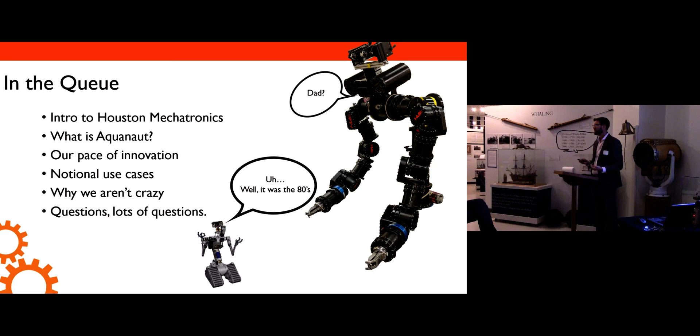There we go, I'll get this one day. Here we go, here's us. Our little company was founded in 2014, and it spun out of NASA's Dexterous Robotics Laboratory. So the principals from that lab said, okay, thank you, government service, making $30,000 a year with a few PhDs is never fun. And this technology - you can imagine, you've seen probably the Boston Dynamics things and all those really cool robots doing backflips - this is the type of technology that's going to run our planet.

And so they spun out and said, maybe this is the type of tech that the world needs. Let's go focus on a problem. And that problem became subsea, right? And I'll describe that a little bit. But now, so that's just 4 guys in a garage in 2014. Fast forward to now, we're 70 people.

30% of the team is ex-NASA. The remainder, like myself, are coming from industry. I came from oil and gas in Silicon Valley. We have a lot of folks coming in from robotics companies like Boston Dynamics and all the normal companies that sort of just tour around.

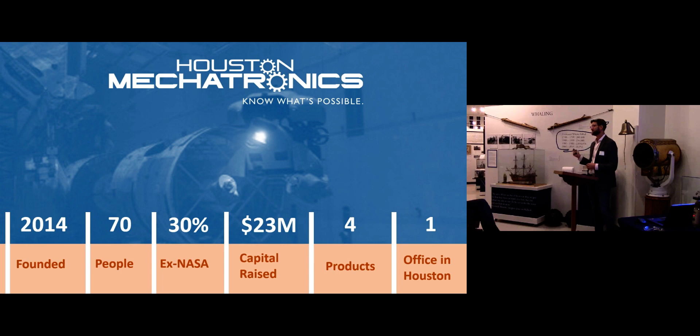We have 4 products. I'm going to talk to you about this one, but we actually launched 4 products, and we only have 1 office right now. That's in Webster, so it's actually close to NASA, where most people used to drive anyway. Our team's average age is 27, which is absolutely ridiculous.

If you walk in — and this is the most fun thing — we had Subsea 7 in the office a few weeks ago, and the number 1 comment was, this does not look like an oil and gas services company, because there's women walking around with mohawks, and everybody's saying these are actually company-issued shoes.

They say HMI on them, be jealous. You know, we don't have to play by the rules. We don't feel that way, right? Because we're pre-product in a lot of our products. We're in this space where we need to innovate, and that space is not a comfortable place to be. It's not the normal type of person that you've seen in the oil field that does this fundamental type of innovation.

And so we don't care. Our formal dress code policy is yes. That is what it is. It actually is one word: dress code yes. We don't care what you wear, we don't care what you do. Come to work, be great at what you do. That's the only rule. And because of that, we've been able to get some really cool talent.

You can see all the companies that come through there, and everybody's smiling in these pictures. Most of them aren't smiling most of the time — they just go to work and they sleep at the office. But that's another part of innovation.

This is also a really cool thing to point out: if you ask a lot of your engineers at work what their background is, primarily the background for us is in robotics. Nearly everyone at the company is a roboticist. Even the folks who are mechanical engineers call themselves roboticists. That's all they've ever done, that's all they've ever known.

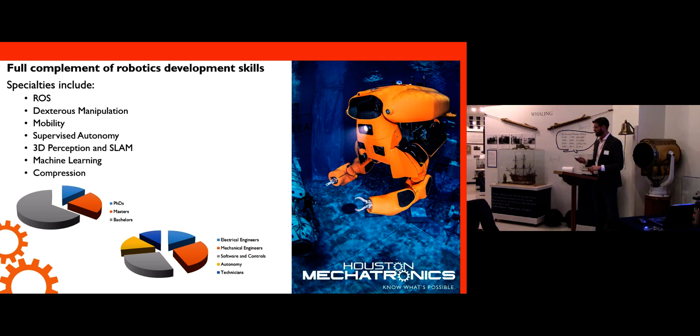And so it's much easier to develop something very quickly. Speed is of the essence when you're at any startup, right? Because you're essentially just staring — they call it the runway — and it's on fire. At some point you're going to need to fly, and hopefully it's before the runway runs out, or else it's game over, like 70% of startups.

We have a little bit of a different background in robotics than the ocean. These are the robots we built. Robonaut, which is in the middle, was a joint partnership between NASA and GM. It's unique because it was the very first robot ever flown to the space station. There's a really cool video of Robonaut shaking the hand of an astronaut.

And the reason it's cool: one, it's cool, it's a robot shaking the hand of an astronaut. Two, there's no e-stop on that robot. If it freaked out, if there was a bug in the code, it would crush the hand of the astronaut and maybe punch a hole through the space station.

Now think about the level of reliability and engineering you need to ensure you're not going to harm one of the United States' greatest assets. Because astronauts are very expensive people to the government, and you don't want to be the roboticist responsible for the space station returning to Earth a little too early. And so that development process...

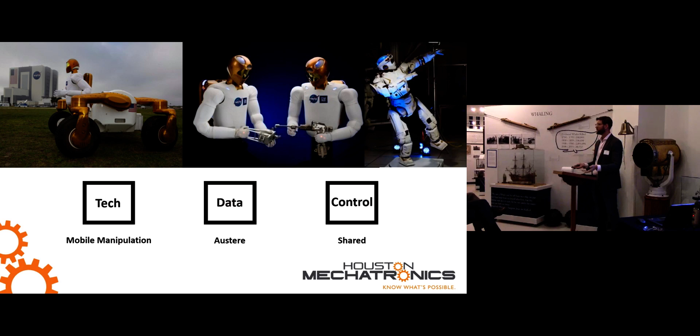You don't see many examples of that in oil and gas. That's why I spent so much time on this slide - we could just be clicking through. This type of robotics is the underpinning of our autonomous manipulation strategy for Aquanaut. And I challenge anyone here to show me an example of that subsea today. I think when we're talking about autonomous concepts, think about that as the underpinning of how we treat the world autonomously and how we manipulate.

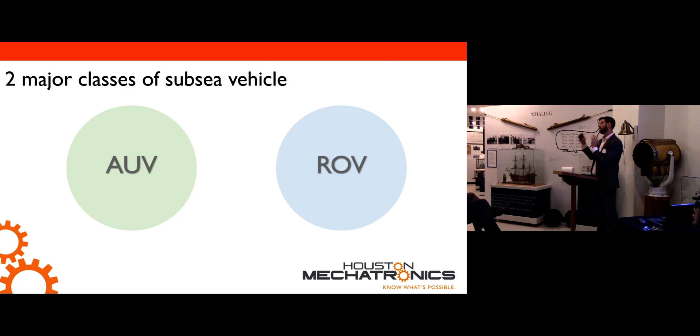So let's talk about Aquanaut. Today, you're familiar with the two types of robots in the ocean in oil and gas - lump them into two, AUVs and ROVs. Autonomous underwater vehicle, torpedo things, and the ROV, which everybody knows about. AUVs are the world that I'm from. In an AUV, the strengths of this platform are - I love them. It can travel at a very long distance, very efficiently, because it is in a torpedo form factor. So it is tuned to go a long, long way, very, very efficiently. That particular vehicle will burn just prop, no sensors, except for what's needed for the vehicle to go. The thing only burns 20 watts.

That's ridiculous. So that machine can host a great number of acoustic sensors and seabed mapping sensors. And its launch and recovery has been worked on since 1995. And it uses a smaller vessel than an ROV. So what it's great at, and what it's used for in oil and gas, is pre-site survey. It is the most efficient way in deep water to survey, period. It used to be deep tow, but then we needed another boat, and Thomas Chance from C&C said, why use the other boat? Cost was the reason, and BP made the choice and said, hey, let's try this technology. That's how AUVs came on in 1999.

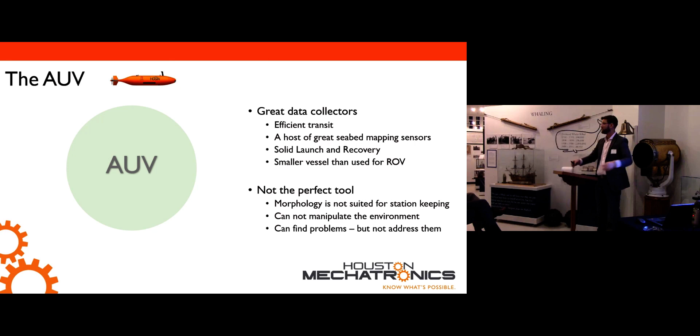It is not the perfect tool for IMR, because it can't stop. They talk to the manufacturers and say, yeah, it can definitely stop. No, nothing that's a torpedo hull form factor can stop and maintain hydrodynamic stability all that well. In order to be very stable, it needs to continue moving. And so when it stops, it actually does a circle, in a very small circle, but it's still always moving. It doesn't also have anything on it to manipulate the world.

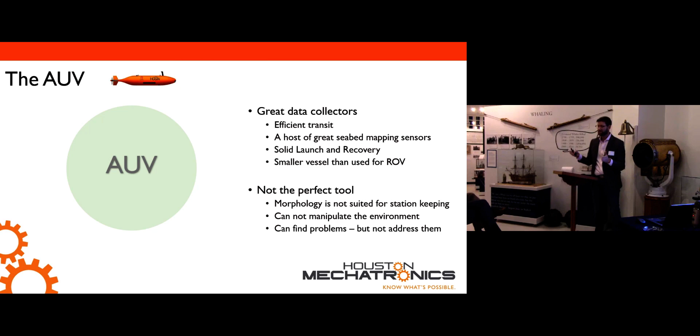ROVs, well, these things are amazing. They are the underwater workhorse of this industry. They are diverse.

They can be outfitted in any number of ways for missions, right? Bolt things onto it. You've met any ROV guys, they're the most resourceful people on the planet. With duct tape and a few zip ties, they can do anything. And that's because this machine is tailored for that. You need to be able to do a myriad of tasks with it. It's great for construction, it's great at station keeping.

There's so many thrusters on it, and it has essentially unlimited power because it's connected to the ship. So it has tons of power, they don't really even worry about it. And it has a decent manipulator on it, right? The manipulators are hydraulic, but people have gotten really, really good at using them. Any good ROV operator is worth his weight in gold.

But they're, again, not perfect, right? Because it's really slow, goes half a knot, maybe not even. The add-on architecture of it means that you're sacrificing data quality. My example is always Android phone versus iPhone. You load a whole bunch of garbage onto an Android phone and the phone will crash. You can't do that to an iPhone because they control the whole app ecosystem better, it's much more of a tied-in ecosystem. ROVs are like the Android, AUVs are like the iPhone. And sometimes you put a sensor on an ROV that was never meant to go on it, and it just doesn't work right, because it's not built to integrate everything. It's just built to hang stuff on, put some power there, send the data back up to the top.

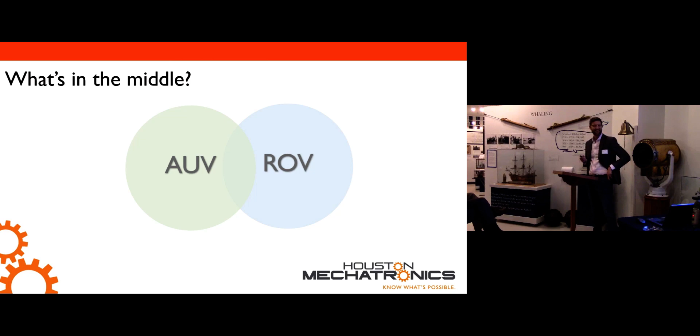And with the magic of a Venn diagram and terrible colors, you'll see what is in the middle of these two things: what can move far, what can manipulate, we can. That is why we made Aquanaut.

It has a cool color, and it certainly looks cool, but the reality is it's a utilitarian device. We had to make it look cool, or else IEEE would never cover it, and we wouldn't get any press coverage. Nobody would ever talk about it if we just painted it gray. But the reality of today's subsea environment is that there is not one good tool to do both things. And the customer, all the operators, they're asking for cost reductions. And how the hell are you going to reduce your costs down past the boat, right? You're just losing money - that's fantastic, but it's not sustainable.

And so we created this type of technology. I don't consider it an ROV plus an AUV, I consider it that weird centaur thing plus an AUV. Because the ROV would be saying, oh, I can teleoperate it - and certainly we teleoperate the vehicle, even right now we can teleoperate it. But the reality of achieving the vision of Aquanaut is that it needs to be able to do autonomous manipulation, and the framework for that does not exist in ROVs. So it's this NASA technology that the team worked on for almost 20 years, thrown into what is essentially commoditized engineering in autonomous technology today.

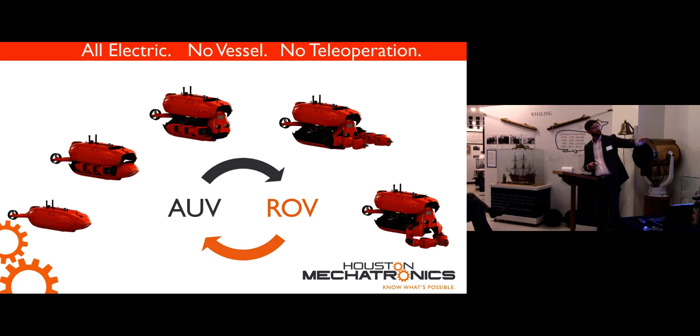The transformation process is 4 linear actuators that push the hulls apart. You can see there's 2 trays - the arms are back in. And the arms come out, and then they are energized and they're ready to go.

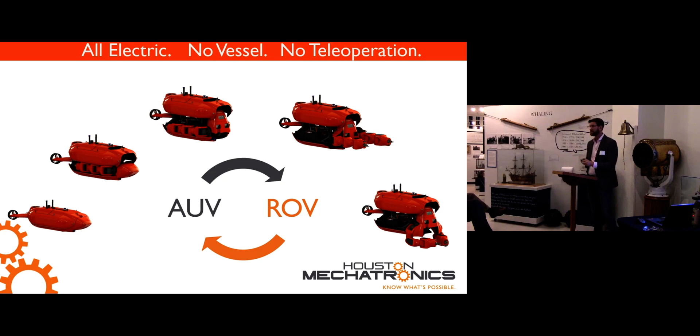Some of the interesting things you'll see here: it's all electric, there's no hydraulics on the vehicle at all. It is built to be used without a boat. We're using a boat today, but the vision of this product, when it's finally done, is it's going to be vesselless. And there's no teleoperation of it - no high bandwidth teleoperation. We hit go, we give it objectives, and it accomplishes those objectives.

In AUV mode, here's all the stuff that's on it. This is very common to other AUVs in the industry. On the very front of the vehicle, it has a forward-looking sonar, a high-frequency forward-looking sonar.

It's got a disparity mapping capability. So if you've ever seen robots like Johnny 5, that first slide, Johnny 5 had 2 cameras. That was a disparity map, so it could use depth of field. It's just a way to essentially map the environment the robot's in. It's optically based, though.

The head unit rotates freely all the way around. So the imaging package inside of the head can actually rotate up and inspect the underside of hulls. It can inspect the inside of a giant pipeline.

We did it so the vehicle can separate payload capability from what the vehicle needs to be able to do. The vehicle needs to be able to map its surroundings. Part of making decisions is equipping the machine with enough capability to map its surroundings. And part of that is that rotating head.

There's a novel acoustic communications array that we worked on with Woods Hole, and essentially it's just a way to reduce noise—signal to noise reduction. The way we talk to it, we do talk to it over a medium frequency acoustic modem. So it's like 1990s dial-up and super high latency. It's a big challenge when you're sharing information between the robot and the human being. We'll discuss how we fix that, or how we figure that out.

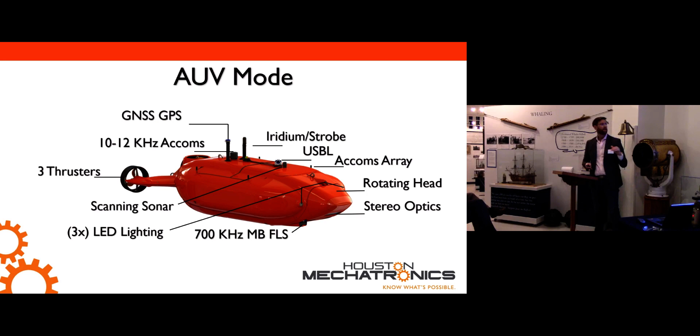In AUV mode, there's 3 thrusters. There's an aft vertical thruster, which controls the pitch of the vehicle, and there are 2 main propulsion thrusters, which is your main thrust, and then some counterbalancing of roll.

There's a mechanical scanning sonar that's very common on ROVs. Again, obstacle avoidance for the vehicle, so it can ensure it understands what's in its sphere of manipulation. And normal LED lights and radio systems and GPS and things like that.

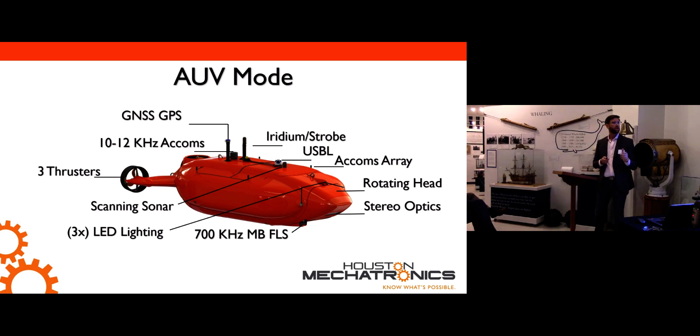When it transforms into ROV form factor, we get a few more little toys to play with. 5 more thrusters come out. You have 2 additional verticals in the front of the vehicle. There are 2 at the side. You can see those, the lateral systems.

Those are pretty neat. It also demonstrates one of the unique design principles we had. If you've ever seen the Michael Bay movies, there's like 1 million moving parts in a transformer. That is not going to be reliable, ever. Part of our challenge here is how the hell are we going to make this reliable? As a keep-it-simple-stupid thing, right?

So keeping it simple means let's make as few moving pieces as we can. That basically means that those lateral thrusters and the tailpiece have a mechanical linkage to the hull. As the hull opens, the laterals move out and the tail moves up so that we're thrusting on CG to make the vehicle more stable in this configuration. And because it's just a mechanical linkage, we don't have to deal with additional actuators to make all these things move.

The arms have 8 degrees of freedom, which is way higher than a standard ROV has. The reason is that in a normal ROV arm, you don't want that many actuators because the human being has to coordinate all that movement, or you have to have a crazy system to coordinate it for you.

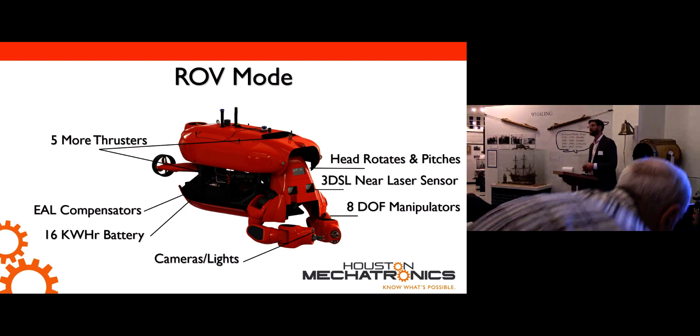It comes in a variety of sizes. This will tell you how big they are. I saw one in Tupperware that was about this big, and it linearly scales — its relationship to LiPo linearly scales with size. So for whatever volume you had in LiPo, it's an order of magnitude more energy density.

The company is Open Water Power. If you want to give them a Google, you'll find they have a few data examples now. So it's Open Water Power.

The EAL is Biomax — it's biodegradable oil, basically cooking oil. That's what we use. It's not under pressure, because it's not actual hydraulics. I'm not using it in a hydraulic system; it's just there for pressure compensation when hydrostatic pressure is high in the system.

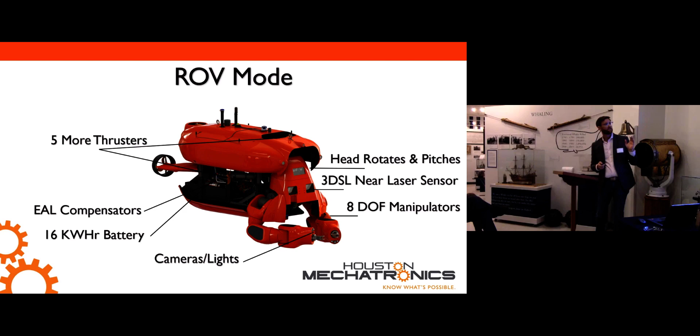I think that's it. Yeah, the head still rotates and pitches so that it can see the road. So that's a whole bunch of stuff.

That color Porsche bought from Ferrari for $40 million, which is just nonsense. We bought it from Pantone for $72.

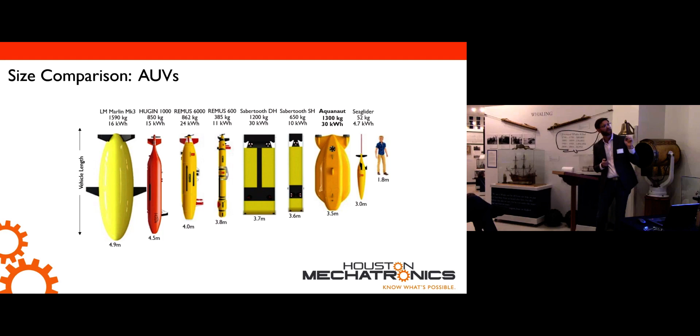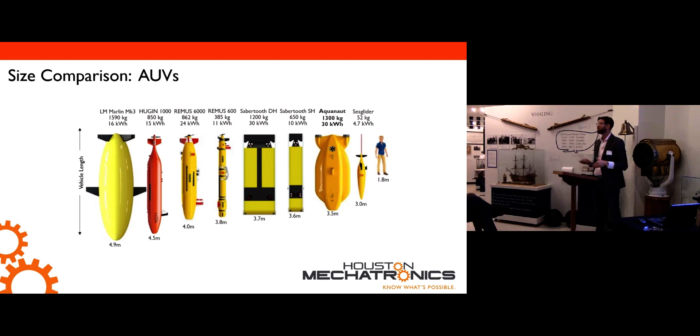So Aquanaut is 1,300 kilograms. It is not small. It's 3.5 meters long in its AUV form factor before the arms come out front. In Superman form factor, where we put the hull up and the arms forward and drive, it's a 5.5 meter long system. So it is not small. In ROV form factor, we're about the same size as an Oceaneering e-NOVUS vehicle. That was done by design. We couldn't be any bigger than a normal work class ROV, and you don't want to be any smaller because then you're not robust enough to handle the conditions for the work.

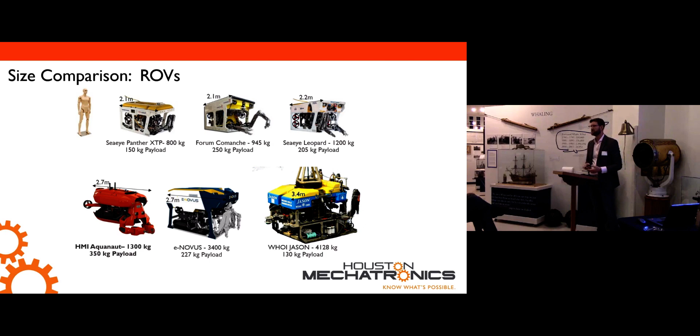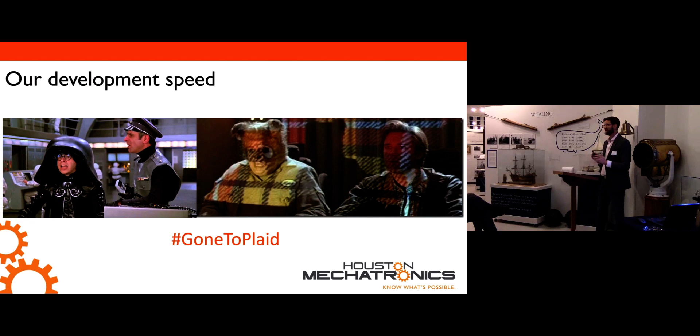All right, our development speed. Most people, when they come to our office a few months apart, are really confused because we move, I call it ludicrous speed, and it feels really fast.

Here's an example. May of 2018, that was Aquanaut. We announced it at OTC. We said, yeah, Aquanaut's great. We had a set of arms. That was its first test right before OTC. We actually cut the trade show video at 11pm the night before OTC opened. That was what we had.

One year later, the vehicle was totally done. We put it in the NASA NBL facility. Again, this time we learned lessons, and there was a whole day before OTC opened, and we recorded all this video for the trade show loop. In the span of a day, those are the NBL divers, they're a necessity. You'll see it doing ROV stuff. It's tethered, but the tether's not for power, it's for communications. Just try using acoustics in the NBL facility, and you'll see it's even worse than the deep ocean.

And you see, oh my God, it actually did transform. And what you don't see is everyone freaking out at the pool deck because you're like, oh my God, this works.

Because that fundamental innovation, you're never sure if what you did is actually going to work. So here we're moving it around a little bit, checking the station keeping ability. This is sped up. We're moving nice and slow in a very measured way because you don't want to ruin the thing you just spent a few million dollars to build.

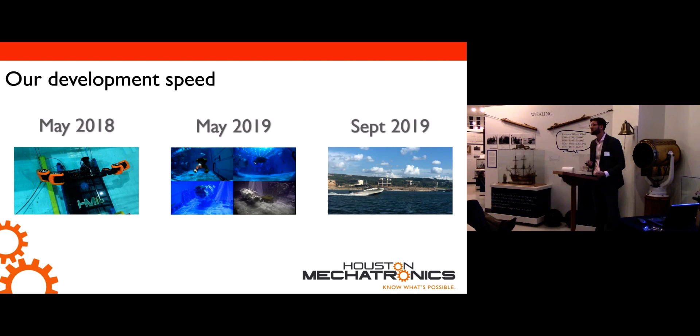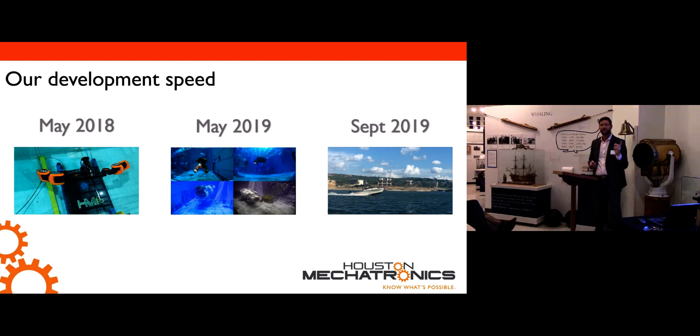And this is the span of just under 1.5 years, and we built something people told us we couldn't build. There's other videos and stuff we can show you. It does autonomous manipulation, and it navigates in free space. This is not by accident, and it is very, very hard to do, but it's just the development pace we have is rapid, and that's very much a startup thing.

Because this is a high failure rate environment, and it's make or break, and we know it. And so the effort of all of these people, and a lot of people sleep at the office when things are real bad, because we have to. And the pace is, I think, exciting, certainly for me, to do this transformational work.

So we'll talk about Aquanaut. That's the vehicle. This is what we're going to do with it.

Is everybody familiar with residency? Hear that term thrown around? Hybrid residency, things like that. So today, the future of IMR is residency. Someone proclaimed that, said, awesome. What is that? So we compared what we want to do versus what residency is, and we came to the conclusion that residency is a stepping stone. It's the next place we are going to go, but it isn't the final destination.

If we look at a few metrics here: response time. Well, with things in the residency, it's in there, it's in the field. Response time is going to be amazing. So that's great for the customer.

Communications, right? That's a robot problem, but that's also a way to de-risk it. High bandwidth comms, because it's going to be cabled back to surface, and then you're going to have your over-the-horizon haul, and that's going to be great.

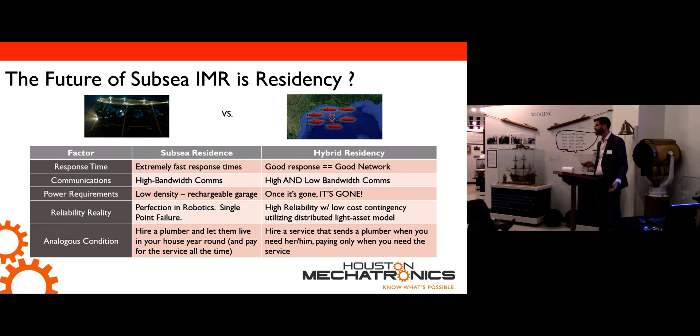This is why we decided to use what we call hybrid residency. Now, I had a name for it, which wasn't popular in the office: light asset, low logistics, distributed service architecture model—LOLISM. That doesn't exactly roll off the tongue. Our CTO had a different name: Uber for subsea. This is what we're getting at.

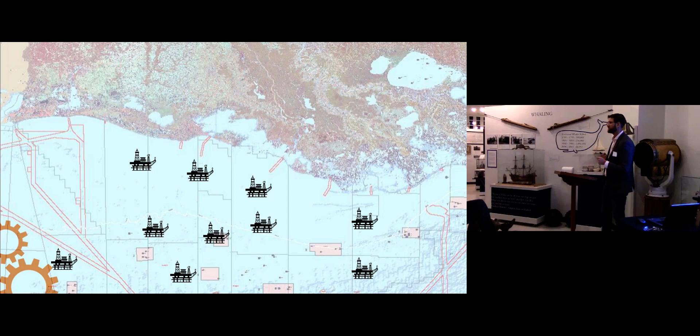Got all these assets in the Gulf of Mexico. Some are fixed, some are moving, but they're all there, they're all topside. We're going to put a bunch of other stuff in the Gulf of Mexico. You're going to call the robot, and it's going to transit to you, and it's going to do work. That way, you're not paying for mob, you're not paying for demob, you're not paying for the robot to be there all the time. You're just paying for it when it's there, just like Uber.

Uber doesn't make money. That's a fair point. I'll show you how we will.

Everyone looks at that slide, and the very first reaction is, you're an idiot or you're crazy, right? And maybe both. And I don't disagree with either statement. But let me show you how we're going to buy down this risk and actually make some cash. How do we solve this equation? It's our burden to solve, right? If we don't make money, then the company goes out of business.

Oh well. There's three big problems that people see with this type of model for us, right? Logistics. How are you going to manage the logistics of that network, right? And how are you going to do that cost effectively? That makes no sense to anybody.

Is the market ever going to want this, right? Everybody says yes, they want it. But will the market ever accept something like this where it's really hands-off? Great example is when we first showed this to Chevron, they said, well, it's kind of like if every Uber car had a wrench, and then you called them out to West Texas to go wrench on something and then go back all autonomously. And I would never do that. So the gentleman saying that, I said, okay, have a great day.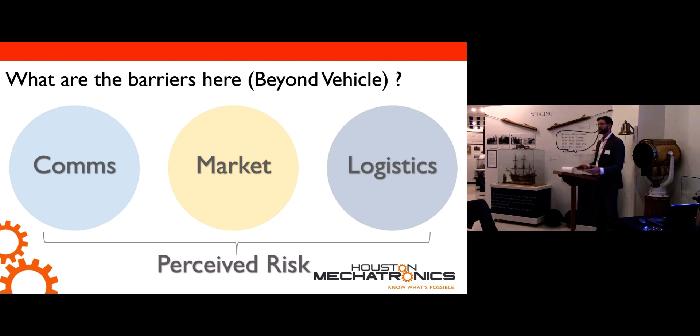So we know that this is a long return period play. And that residency may be the thing, right? That may be what we do first, because the industry's starting to accept it. And residency is a great problem for us, because we have way more comms than we thought. We have way, way higher bandwidth than we thought, so it's much easier for the platform to do it. But when we control Aquanaut, we talked about this shared control.

The safety stack of Aquanaut is pretty interesting. And it starts with the technology we put in the robot, and it ends with the human being, right? So you take your normal hazard stuff, take your normal risk profile, and you program that into the robot.

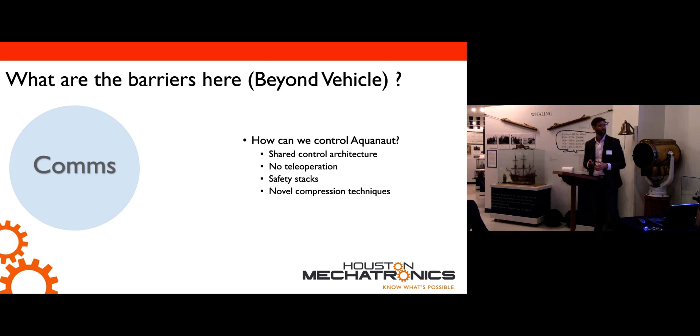That's what we call force torque control. That's a super, super important thing to have. You don't see any ROVs that have it today. What it is, the robot understands how much force it is imparting onto the world. And in the safety stack, we say don't impart more force than X in this instance. Because the valve's stuck, don't just snap the valve stem off. Right? It's essential. One of the key parts about sharing control of the robot is equipping it with the instrumentation it needs to see the world, to figure out what it's doing to the world. And that's force torque. When it reaches that maximum force threshold, it senses that and says, oh no, I can't impart over X newtons. That's not going to happen.

So to gracefully stop doing that, it's starting to counterwind its other joints. That's where you see that arm motion where it goes this way. And once it counterwinds the joints, it unloads that force, then it stops the action. The programmed action is to release whatever it's doing, back away, and call home. That is the program action for, say, an over-torque event. There's one example of how we can put the safety stack in there, deal with bad comms and an over-the-horizon e-stop, and still not harm equipment.

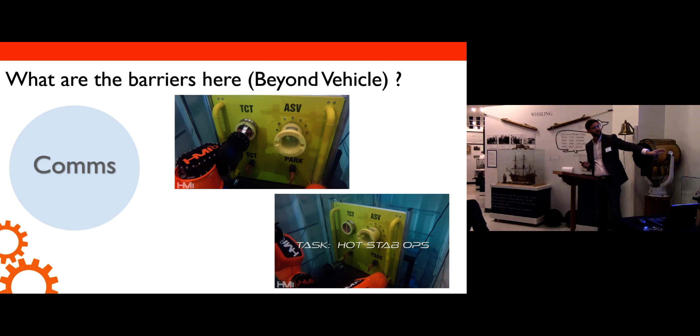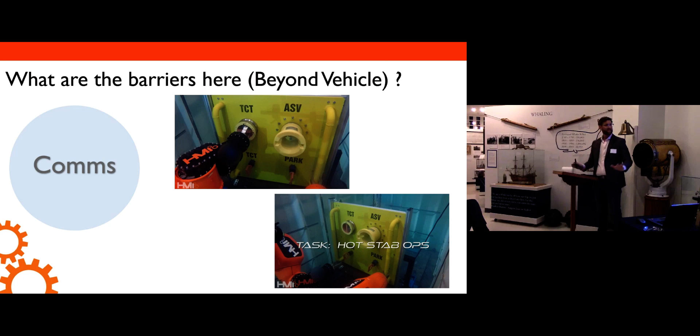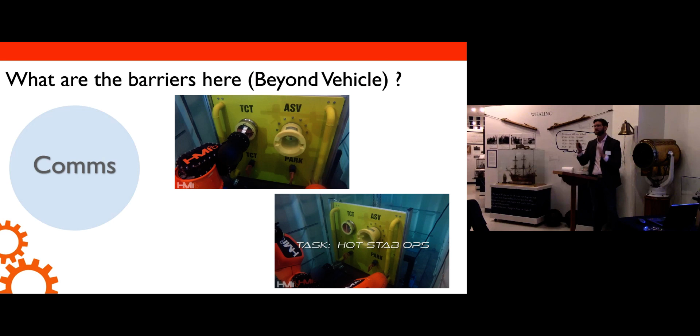There's advantages. Again, a lot of times we talk about a robot and making a choice for the robot technologically that ends up being really good for payload. So when we do a hot stab, we take the same technology, and what it allows us to do is misalign the hot stab, which in ROV work is a pain. We misalign it and watch the arm move a lot like when it goes to reinsert that hot stab. The arm moves a lot like a human arm, where if you were misaligned like this, you would move your elbow in and apply force. So see here, it goes down and over and then puts the hot stab in. We didn't direct it to do anything, so it puts the hot stab back in the hot stab receptor. That's it. But because it has all the sensing on the arms, it says, okay, the forces aren't aligned correctly on the axis, I need to reorient the arms, push it in. So a super useful piece of technology that both keeps the asset safe and helps the robot do its job better.

Logistics. How are you going to get things to site? Question we are asked all the time. There's several ways to do this. The primary way, and the way that we are likely going to demo next year, so we're all about showing things. People love talking, so we think talk is cheap, right? So we're going to actually go do this, and we actually found an operator who's willing to let us do it.

They have offered us to put Aquanauts on all their drill rigs, right? There's value add there, Aquanaut can do a lot of the ROV type work. And if we want to, we can just go that way and go do something, right? And so you start looking like, well, what the hell does that even mean?

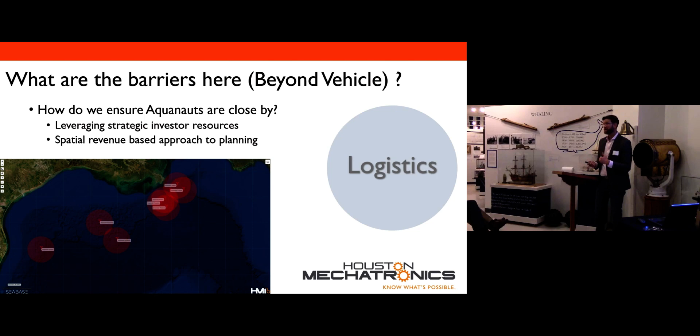So really great to see the customers are already starting to think forward, and say, is this crazy or is this real? I think that's kind of the flavor we got from them, but I'll take it anyway.

And in the beginning, it certainly will. We're going to have to figure out robot problems, make things more reliable, tune the system. But we're a venture company, right? We're venture capital funded, so it's our job to figure that out. The venture capital position is great. I don't have to wait for an operator to pay for something, I don't have to take money. We have not taken a single dollar from an operator to build Aquanaut.

We built it on our own dime. Obviously venture capital money, but we call it our own money because it's not free—you do have to give part of your company away for their cash. But that venture capital position allows us to aggressively invest R&D in an area we feel comfortable in and not have to wait for the industry to go there. So we can push the boundary of what we think is real today.

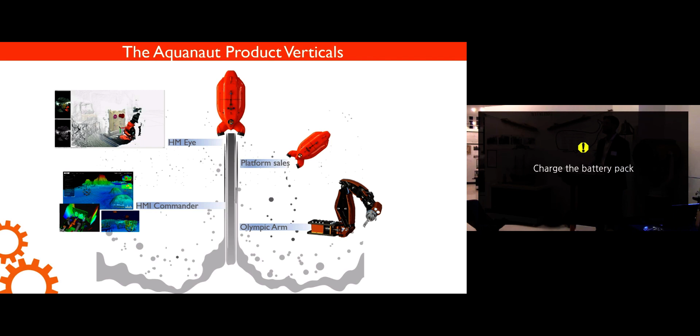So here's our product tree. Aquanaut is the thing—that's our moonshot. It's going to work, we're very comfortable with that. But we're not going to hedge that that's the only thing that's going to happen. The arms are really neat on Aquanaut. They have a lot of sensing, their precision is really high, so we said let's rip them off and make ROV arms.

So we're going to do that. And we said, all right, well, ROVs don't want the same crazy stuff that we're doing, so let's make them a little bit more realistic. It looks very much like a normal ROV arm. It's way easier to operate because it has all that autonomy built into it, but it's still teleoperated. It's just really automated. And it's all electric.

Everybody's launching all these electric ROVs with these little teeny tiny arms, and it's so cute, but they can't do anything. And if you look at all the electric ROVs today—SMD just came out with this beautiful ROV, and it has a hydraulic power pack on it to run the arms. That is foolish, straight up foolish. And the reality is nobody thinks you can build an electric arm that's strong.

We did. Just yesterday, I witnessed a test. We pushed 14,000 pounds with one electric actuator that was this big—that's in there, five of them. That arm at full extension can hold 700 pounds out straight and do little twirlies, but that's electric. I just saw that.

But that's just because we made Aquanaut, and we said, man, that's really cool tech, let's peel that off into its own vertical. Our company can still survive—we can make money now while we're waiting for Aquanaut to mature.

Same goes with the software that runs Aquanaut. We call it Commander. We're productizing Commander and some of the vision system—we call it HM Eye, see what I did there. And those two things, along with the Olympic arm, are going onto a conventional ROV to make it smarter. Because ROVs could be smarter, and people accept some automation on ROV. So we're going to be able to take in all this machine vision data, have the arm more point and click, so that we can get people used to these types of concepts on normal ROVs, so that it's less scary when Aquanaut comes to town and is doing it by itself as its own piece of hardware.

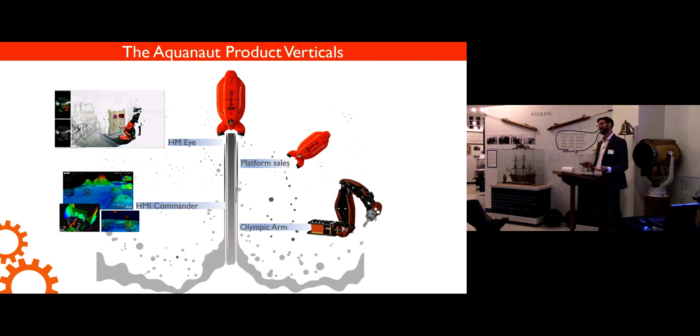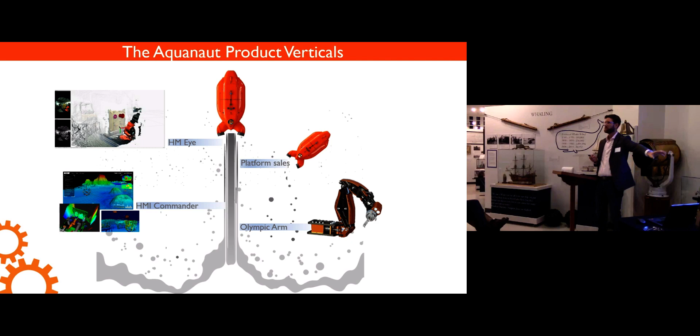The comment about giving your position away - the government really likes things that can do stuff underwater without giving your surface position away, and their risk tolerance is a little different than this market. They say, well, we think we can do that, and you're like, super great, here's my wallet. And if you can't, then the wallet goes away. But the good part is, right now we're in that great phase where they're giving us these challenges and we're figuring out new ways to do work, transferring that technology amongst this family, so we can stay in business while we're waiting for the thing to mature.

Very last thing - disruption, right? I hate this term, but I love this slide. We are a disruptive company. We are building disruptive technology. And in many ways, we're innovative.

There's this line we always use, straight out of our venture pitch deck: 12% of Fortune 500 companies are still in business. Everybody loves to say that. The reality is, I think of disruption this way, because disruption is a dirty word. Disruption is, as a business, you get big enough so that one day you manage success. That's what you're amazing at managing - you manage the success of your company.

But fundamental innovation is the management of failure. As a big company, you forget how to manage failure because you've taken failure and made sure you don't do it. You're only managing success, not managing failure. We manage failure, we're okay with it. Where we are today in innovation, we have to be okay with it. As we progress, we'll hopefully be the same big old company that says, oh, I remember when we used to screw up all the time too. We loved it - we called it an asset.

There's a process, a standard we follow—it's essentially ISO 9001 for code. It's difficult to manage the risk of that code doing something you haven't seen, given how dynamic the environment the robot is in. Figuring out how to do that with sim, and figuring out what we need to qualify it with, has been a challenge thus far, and I think will continue to be a challenge, because autonomous manipulation is sort of the unicorn thing.

One thing is lab testing and another is actual dynamics—it's easy to do in sim, but putting it in the ocean is not cheap. You don't exactly get people to just turn the valve on that tree. No, that won't happen.

Well, it leads right into a very simple economic question instead of engineering. Who did the return on investment analysis for your venture capitalists? Schwab. Really? Yeah, because that would seem to be a very interesting analysis. There actually were some—

There had to be a whole bunch of unforeseeable roadblocks. So the ROI is one thing, and the risk associated with it is another. I think they understand it.

We are very much a transparent company—you have to be. You can hide stuff in oil and gas, but at one point you're going to put your stuff in the ocean. So we understand the risk of this development is high, which is why you see the product diversification—you put in new silos for things that are easier to buy, easier to make money. But the payout here is pretty high.

Well, it could be very, very high. That's why I was wondering who did the analysis. Yep, no, we've actually gone through it again—we just had another investment bank do the analysis again, and it has not changed. Well, I'm going to call it, but I don't believe it. I'll take it though.

You talked about the dynamic environment and how you can't predict everything. What happens—I know this might seem far out—like what happens if it gets attacked by a shark or a squid? Is it going to fight back, or is it just going to get crushed?

Hold on, no, don't show that. Shark punch mode - that was one of the early t-shirts. It does not have shark punch mode. PETA would be all over us.

The reality is, we call it off-nominal events. We're not going to know what happened, period. So we go by platform dynamics. We know the dynamics of the platform - we should be rolling, pitching, yawing within a maximum band. If something outside of that happens, we have a behavior the robot can execute. We won't know it's a shark. You can take a picture and send it to shore, and find out it was a shark, or a squid. But the reality is, any wildlife or unknown event can be measured in the forces the robot is experiencing - it may be an inertial force like acceleration, or a roll moment, yaw, whatever. Inside the safety stack you always have the expected conditions, and if they're outside of that, what we have right now, not perfect by any means, is the robot needs to stop what it's doing and move to a safe place. Same as a human being - you stop the job, get to safety. That is what the robot does.

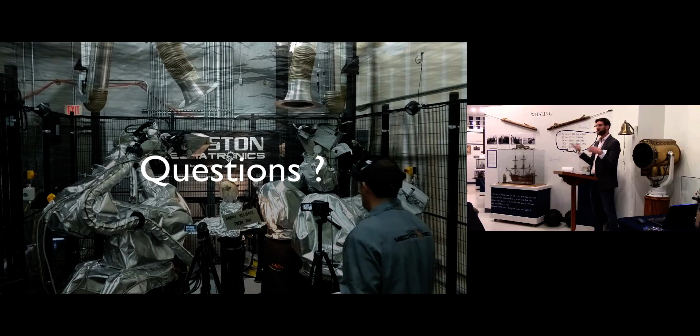So, maybe slightly wrong, but with computing power they talk about doubling, like Moore's law. Is there something equivalent with robotics? It's not directly tied to Moore's law, but our ability to be self-sufficient is tied to it. Every year we do have twice the computing power in some instances. The phrase is edge computing - you've heard of that before. It just means the robot's brain gets bigger. What we have on board, our electronics model is updated every 6 months. We are now on revision 4 of all the equipment on Aquanaut in 1 year, and most of that is computing power, because we need to take advantage of every single teraflop we can in order to ensure the robot can process the data efficiently.

It's absolutely amazing - there's a professor at Tulane in Louisiana, Frank Tipler, you may come across him, I'll send you a link. He wrote about this 20 years ago, and most of his predictions are coming true. He says ultimately the robot or the artificial intelligence will surpass human intelligence, and it will include emotion. He's predicting this, and I keep thinking we're getting closer and closer to those points. I don't want to see that day. I don't think that day... not yet.

What about water depth limitations? Right now, the current version, the very first version, is 300 meters. The version coming online next year is 3,000 meters. And then midway through 2021, 6,000 meters.

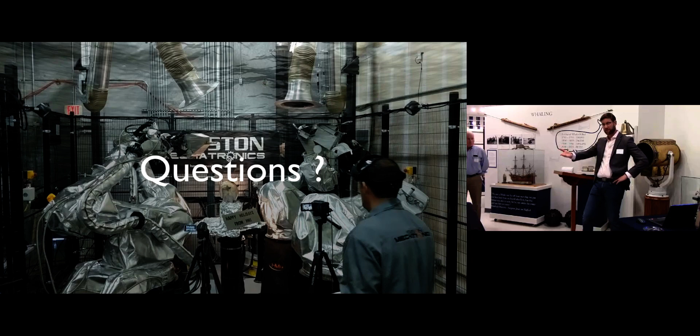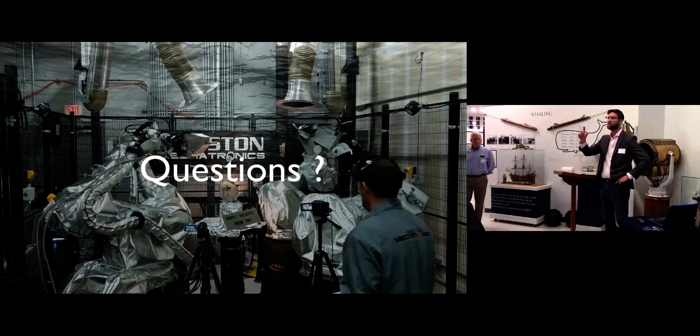And the launch and recovery system is autonomous as well? Yes, we're on that thing, LRS systems - you get 100 different revs on it, so we're on rev 106. It's no slip ring, so it's a self-contained system because we want it to be usable from vessels of opportunity. If that vessel has a crane, we want to just put this thing on there and dump it in without worrying about slip rings and special winches. So the vehicle homes to the docking interface, mates with it, and comes through the air-sea interface. It's pretty neat as it stands now, but we've only built it small - we haven't built it at scale yet, so who knows if it really will work.

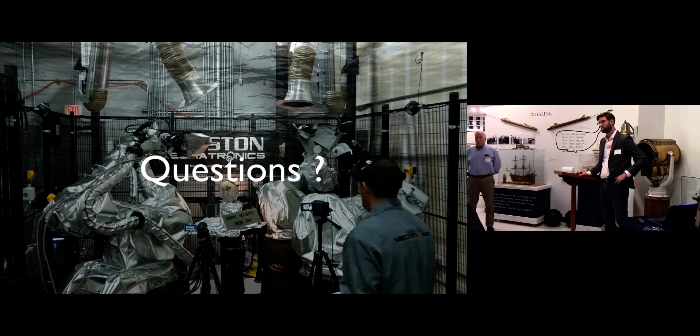Okay, guys, I think we've got to wrap it up and let people get home. Sorry. No, I think everybody's been very patient.